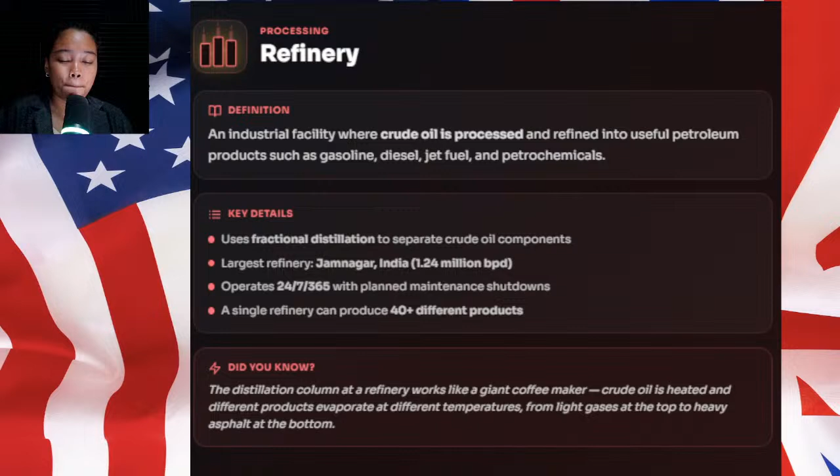Okay, again, that is a refinery. Next, we have the roughneck. A roughneck is a member of the drilling crew who works on the drill floor, handling drill pipe and operating equipment during drilling operations. So a roughneck is a skilled member of a drilling crew who performs the most physically demanding tasks on the drill floor of an oil rig or offshore platform.

It is working at the heart of the busy environment that is a modern drilling site. Roughnecks are responsible for handling heavy equipment, ensuring that the machinery keeps running during high stakes extraction operations. Their roles and responsibilities vary a lot. The life of a roughneck is defined by intense labor and the mastery of specialized drilling tools. First, they should be able to handle the drill string.

Roughnecks are primarily responsible for handling heavy drill pipes, tongs, and slips during the process of adding new sections to the drill string. And then there's shift work. They typically work 12-hour shifts in often harsh environmental conditions, maintaining a 24/7 operation schedule. And then equipment maintenance: beyond manual labor, they assist in operating and maintaining the rig's complex machinery, which includes the mud system used for circulating drilling fluids.

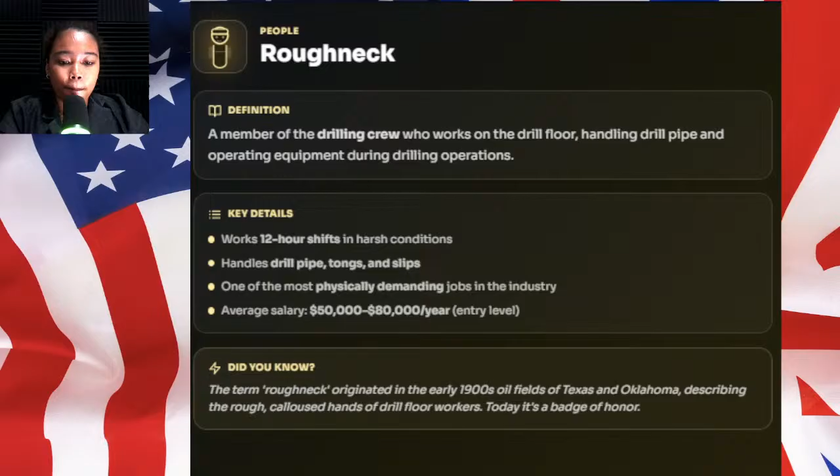Earlier we've talked about the worker called the roughneck, which is more on the complex process. So their job is really complicated. It's very dangerous in a way because they do handle drill pipe and operating equipment during drilling operations. Well, roustabout is still a complicated and hard job. No, it is an entry level labor, though it is very hard. It's still a very hard job.

Okay, so here, roustabout is an entry level labor who serves as the foundational workforce on an oil rig or within an oil field. They are often described as the boot camp of the oil industry. This role is essential for maintaining the busy environment and operational flow of both onshore and offshore drilling sites. Their roles and responsibilities: they are responsible for a wide array of general maintenance and support tasks that keep the drilling site safe and efficient.

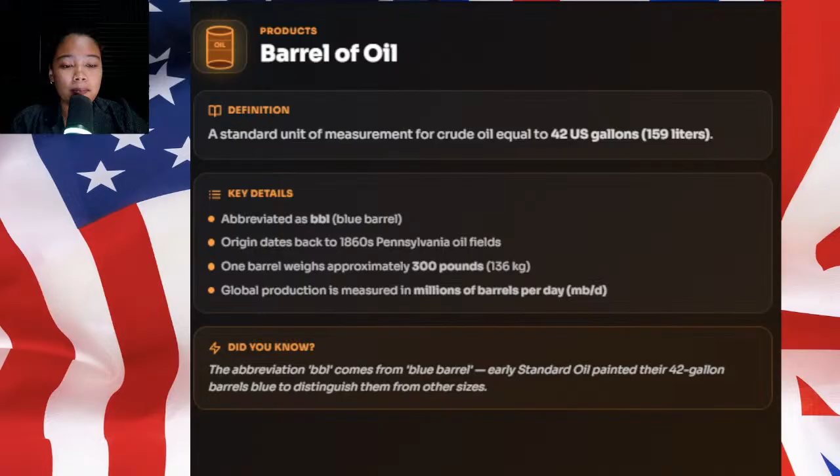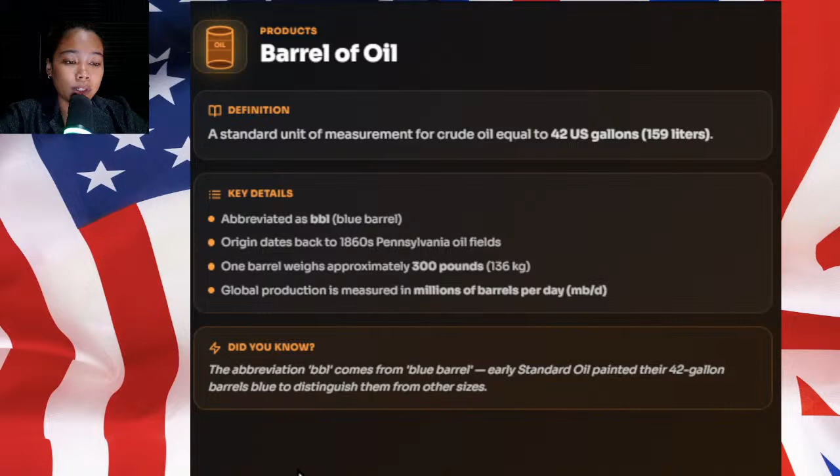So, for the whole oil and gas vocabulary, we've already talked in the past few sessions about 25 essential terms that you should know. Let's do a review of these terms. I'm gonna say the term and then define it. Okay? As simple as that. All 25 terms. First, barrel of oil: a standard unit of measurement for crude oil equal to 42 US gallons or 159 liters. Blowout preventer or BOP: a large specialized valve installed at the wellhead to seal, control, and monitor oil and gas wells to prevent uncontrolled release, blowout or gush.

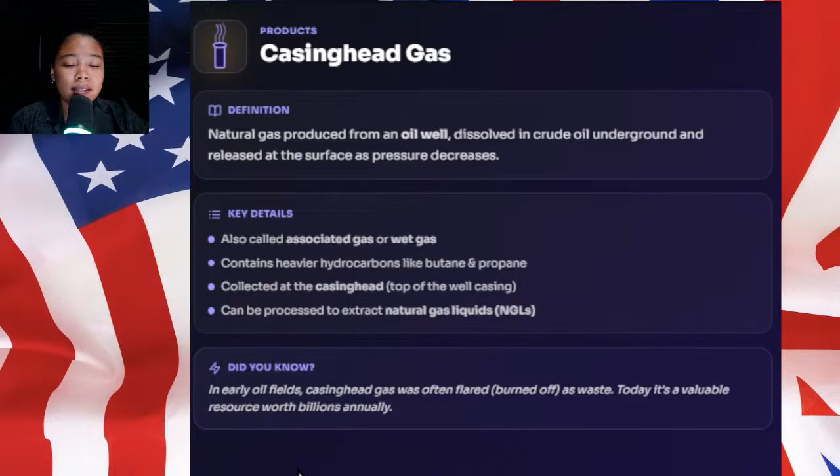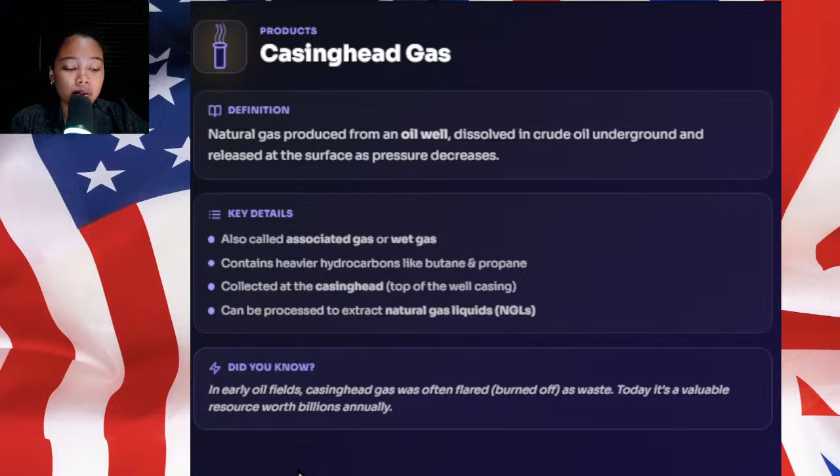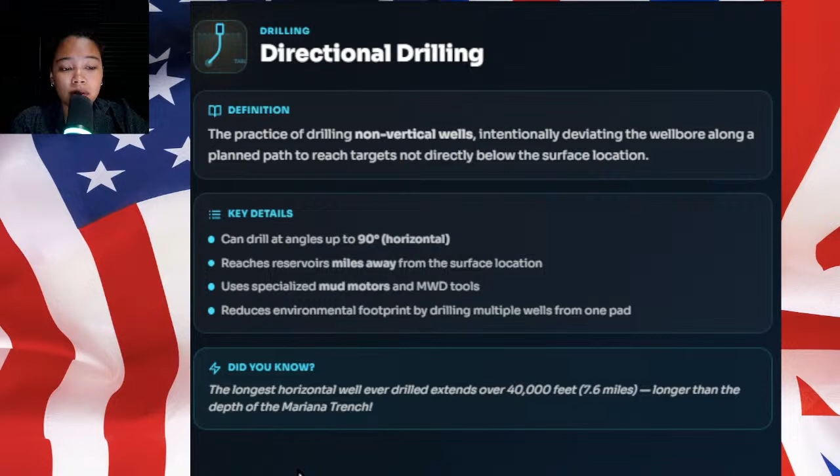Casinghead gas: natural gas produced from an oil well, dissolved in crude oil underground and released at the surface as pressure decreases. Next, catalytic cracking: a refining process that uses heat and catalysts to break down large, heavy hydrocarbon molecules into lighter, more valuable products. Next, directional drilling: the practice of drilling non-vertical wells, intentionally deviating the wellbore along a planned path to reach targets not directly below the surface location.

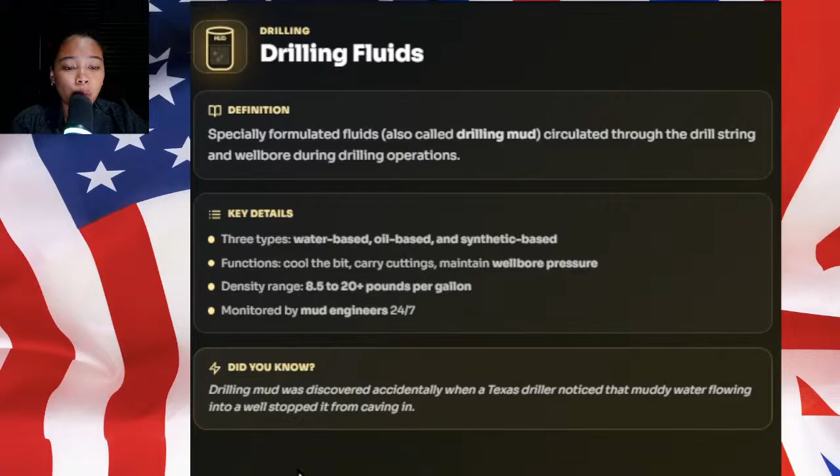Drill bit: the cutting tool attached to the bottom of the drill string that breaks rock to create the wellbore. Drilling fluids: specially formulated fluids, also called drilling mud, circulated through the drill string and wellbore during drilling operations. Engine oil: a petroleum-derived or synthetic lubricant used in internal combustion engines to reduce friction, cool components, and protect against wear. Fault trap: a geological formation where a fault or fracture displaces rock layers, creating a seal that traps oil and gas in a reservoir.

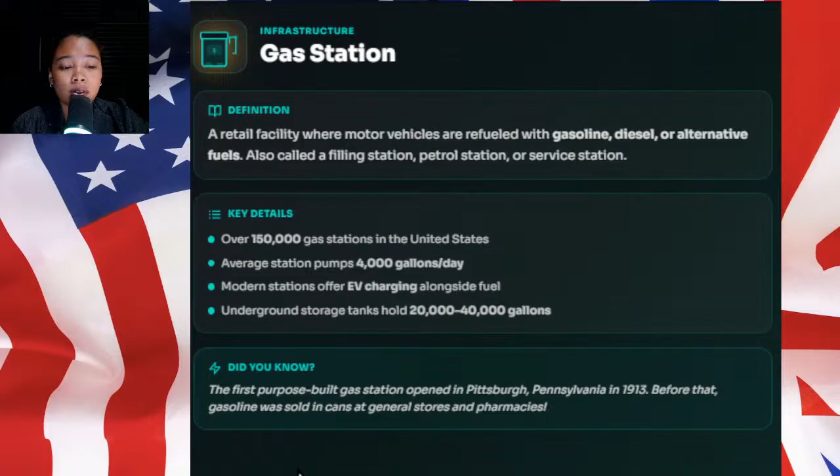Gas station, a retail facility where motor vehicles are refueled with gasoline, diesel, or alternative fuels, also called a filling station, petrol station, or service station. Gusher, an uncontrolled release of crude oil or natural gas from a well after pressure is encountered, causing oil to spray violently into the thin air.

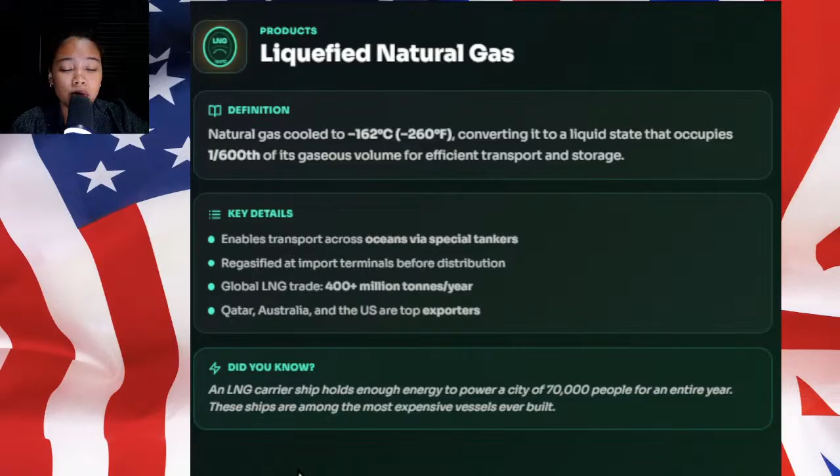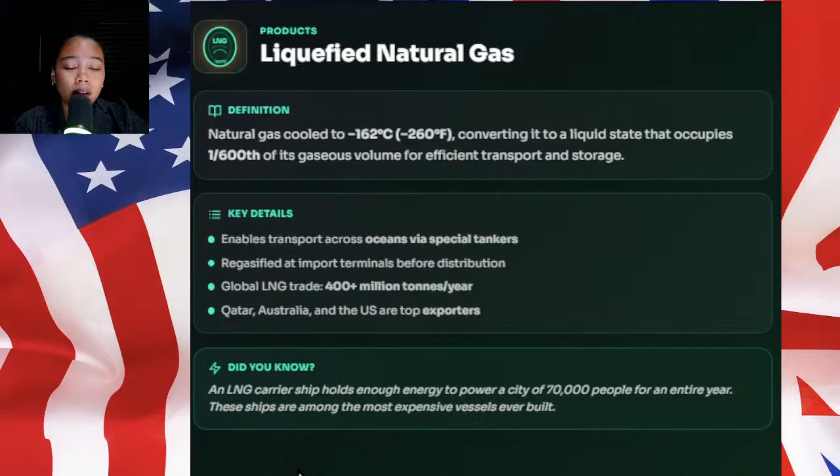Injection well, a well used to inject fluids such as water, gas, or chemicals into an underground formation for enhanced oil recovery or waste disposal. Liquefied natural gas. Natural gas cooled to negative 162 degrees Celsius or negative 260 degrees Fahrenheit, converting it to a liquid state that occupies 1/600th of its gaseous volume for efficient transport and storage.

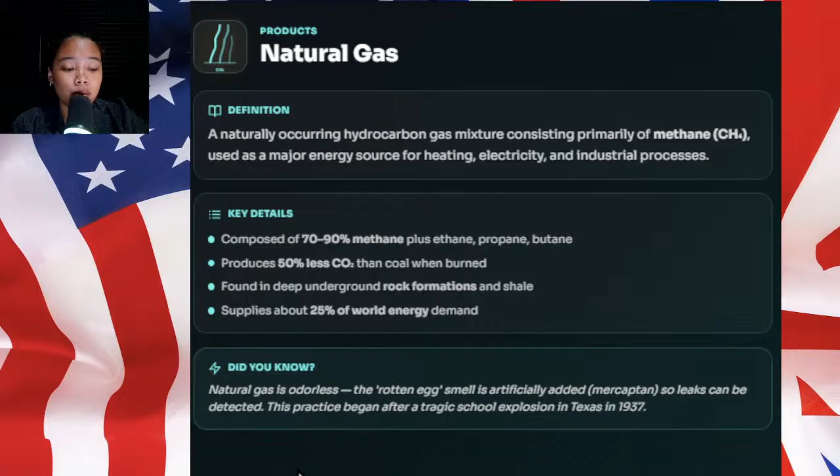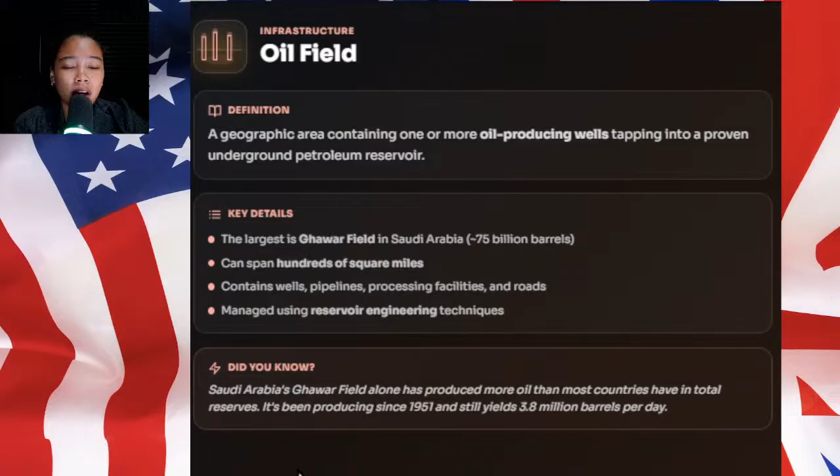Natural gas, a naturally occurring hydrocarbon gas mixture consisting primarily of methane or CH4, used as a major energy source for heating, electricity, and industrial processes. Oil field, a geographic area containing one or more oil producing wells tapping into a proven underground petroleum reservoir.

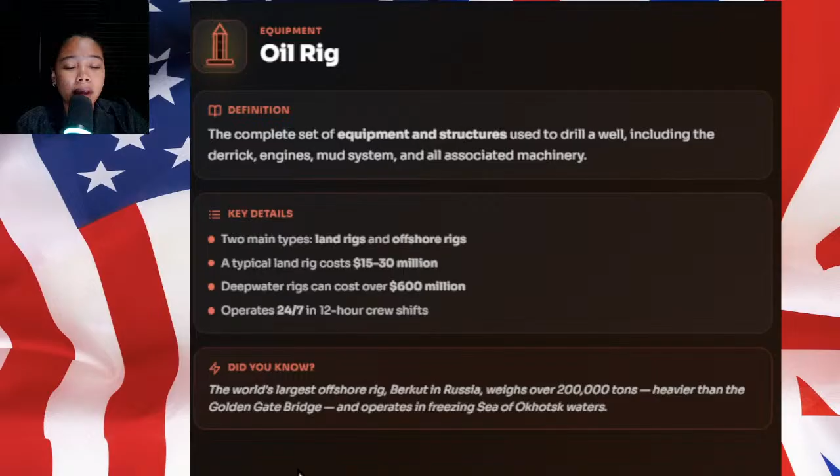Oil rig, the complete set of equipment and structures used to drill a well, including the derrick, the engines, mud system, and all associated machinery. Oil well, a boring or hole drilled into the earth to extract crude oil and petroleum gases from underground reservoirs.

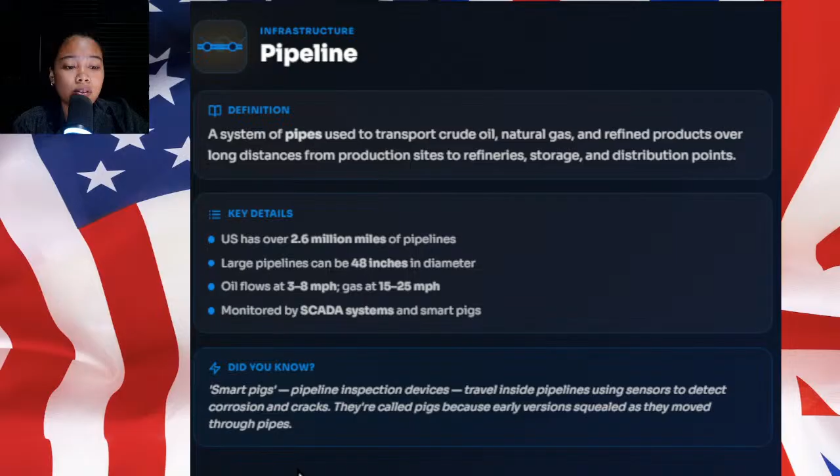Petrol, a volatile, flammable liquid hydrocarbon fuel refined from crude oil used primarily to power internal combustion engines, called gasoline in North America. Pipeline, a system of pipes used to transport crude oil, natural gas, and refined products over long distances from production sites to refineries, storage, and distribution points.

Platform, a large offshore structure from which wells are drilled, produced, and maintained, serves as a base for drilling, production, and crew accommodation at sea. Plugging of well, the process of permanently sealing a well that is no longer productive using cement plugs at various depths to prevent fluid migration and protect the environment.

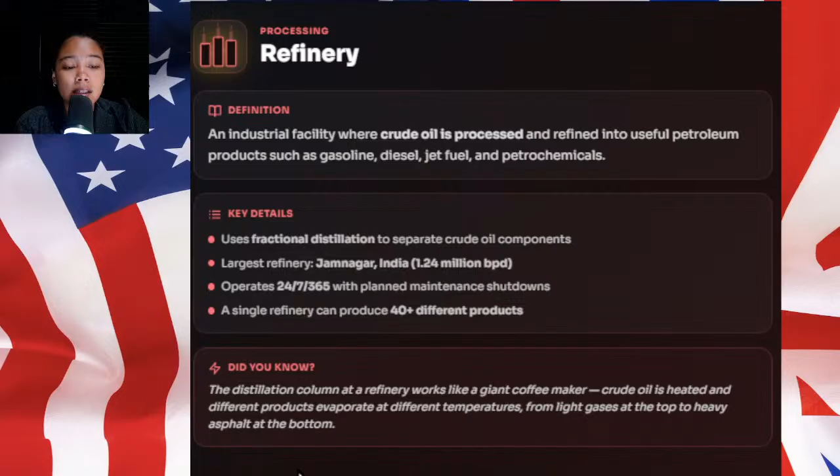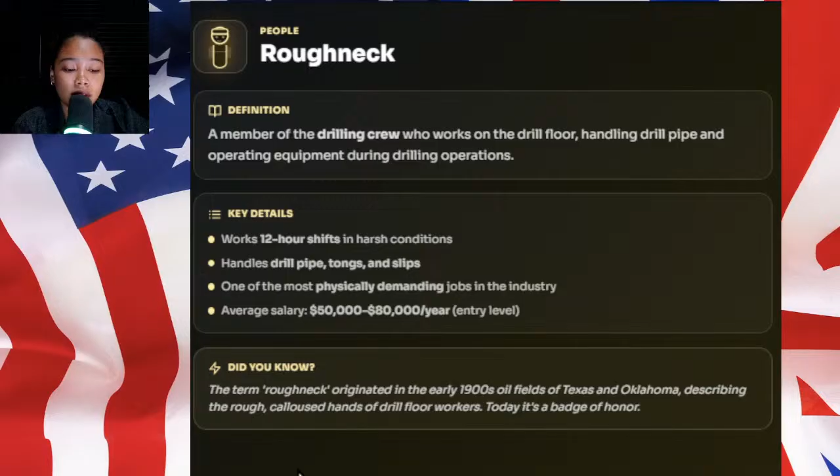Refinery, an industrial facility where crude oil is processed and refined into useful petroleum products such as gasoline, diesel, jet fuel, and petrochemicals. Roughneck, a member of the drilling crew who works on the drill floor, handling drill pipe and operating equipment during drilling operations. Roustabout, an entry level laborer on an oil rig or in an oil field, responsible for general maintenance, cleaning, painting, and assisting with equipment operations.

And the last term is tension leg platform or TLP, a floating offshore platform held in place by vertical tethers, or what we also call tendons, which are connected to the seafloor, designed for deep water oil and gas production. That is the tension leg platform. And those are the different terms for the oil and gas vocabulary.

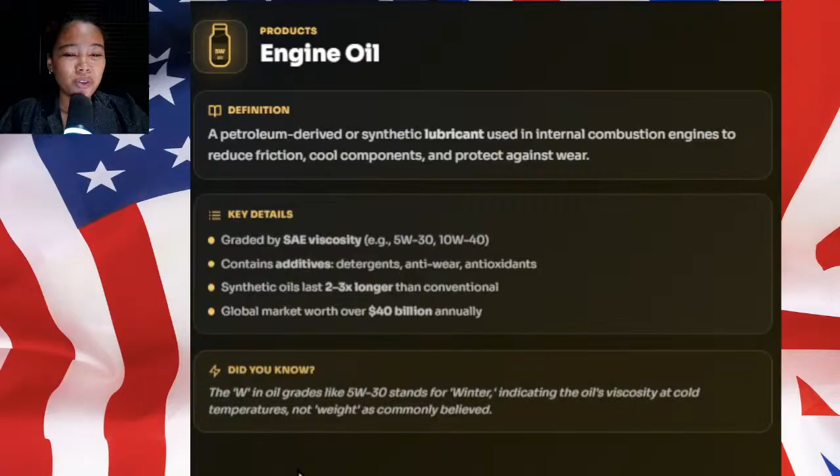So that was a really long journey to learning the 25 essential terms of oil and gas vocabulary. There were four parts. I decided to do four parts because the terms are really complicated and I don't want to overwhelm you. Okay? So that concludes our deep dive into the essential terms and roles of the oil and gas industry. We've traveled from the initial discovery of a fault trap to the high stakes drilling managed by a roughneck on an oil rig or offshore platform.

Through these profiles, we've seen how the industry operates as a complete set of advanced technology and human labor to provide a vital service to the world. Whether it is 2.6 million miles of pipeline or the complex chemistry of catalytic cracking that creates our petrol, every stage is defined by precision and safety. Finally, the plugging of a well ensures that we protect the environment long after the production of a barrel of oil has ceased.

So we've discovered different phases. First is the discovery, the operations, the safety, the transport, and of course, the end of life. I hope all of the descriptions that I've provided throughout the four sessions are clear and engaging as the foundation of your learning for this particular vocabulary.